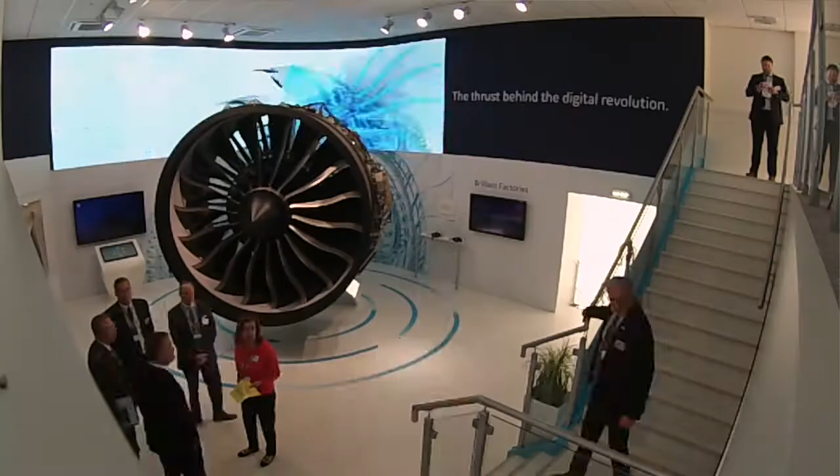Thank you, Rick. One of the very first things I want to make clear is that when GE acquired Avio Aero, there was a lot of talk about them just being a supplier to GE. Not true. The desire from day one was that your business would grow its third-party relationships. At the air show, our vice chairman, David Joyce, made the point that Avio Aero has grown the third-party business by more than 10%. So, Riccardo, tell me about the focus there and why you think that's been successful.

Well, I think at the very heart of this success is all the firepower that GE gave us in terms of adding technology and manufacturing capabilities. We have been investing close to $100 million every year since the acquisition in our facilities. If you go there today and see how they look compared to what they were, in many cases you hardly recognize these facilities. And we see it, and our third-party customers see it as well.

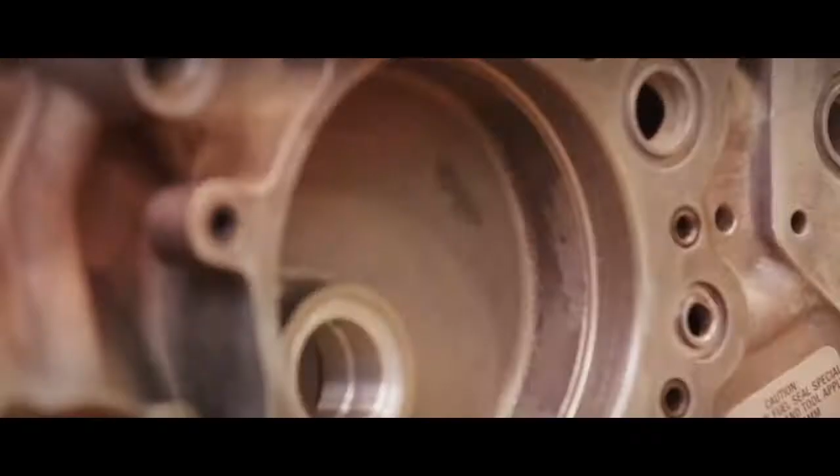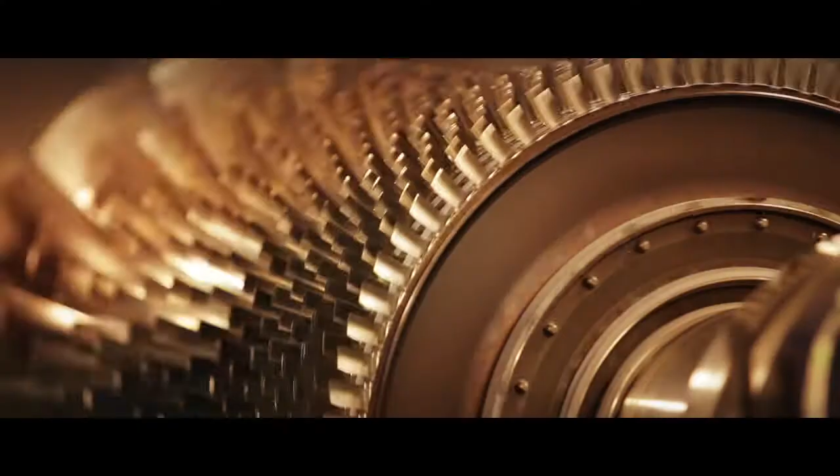Building and designing gearboxes is extremely challenging. It's one of the most difficult things on a jet engine. It's complicated. First of all, a gearbox could have 200, 300, 400 parts in it. So it's a small engine in itself, really. We go all the way from building the single parts and putting it together, to testing. It's a very complex exercise.

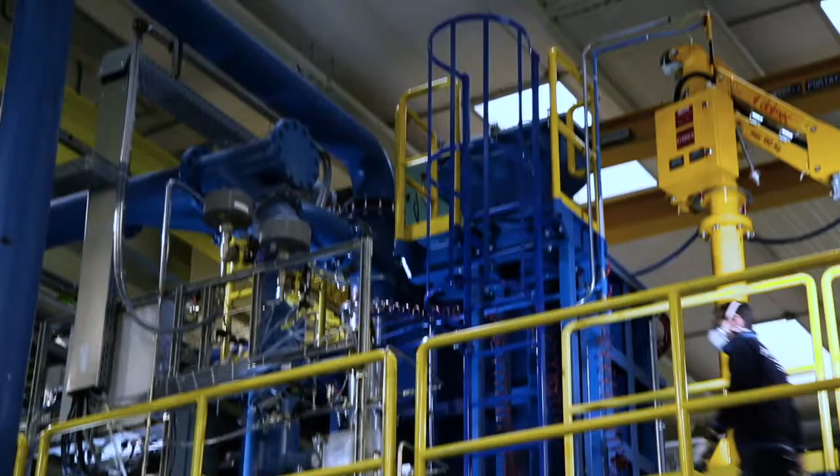Another subject, additive manufacturing. As we all know, GE has made a big move in additive manufacturing, but at Avio Aero this has been a technology we've been engaged in for a long time. At the air show, our vice chairman and president David Joyce was quick to point out that Avio Aero is now building 3D printed low-pressure turbine blades made of titanium aluminide, which is quite an accomplishment. We started investing, cooperating with small startups, then formed a joint venture and eventually acquired.

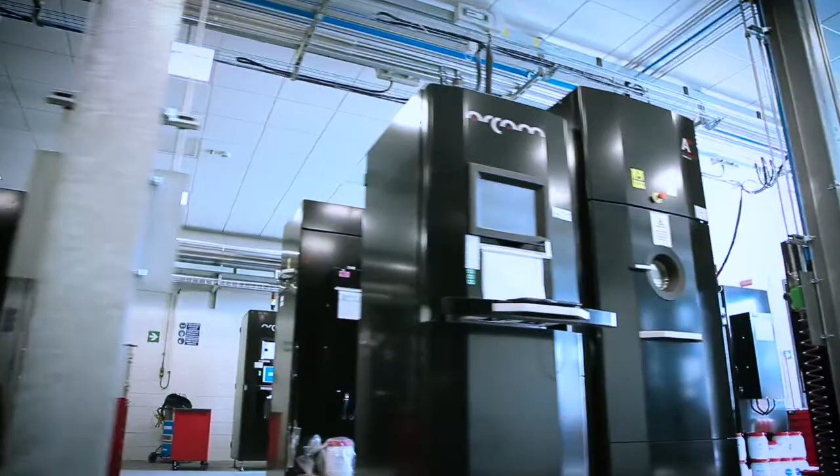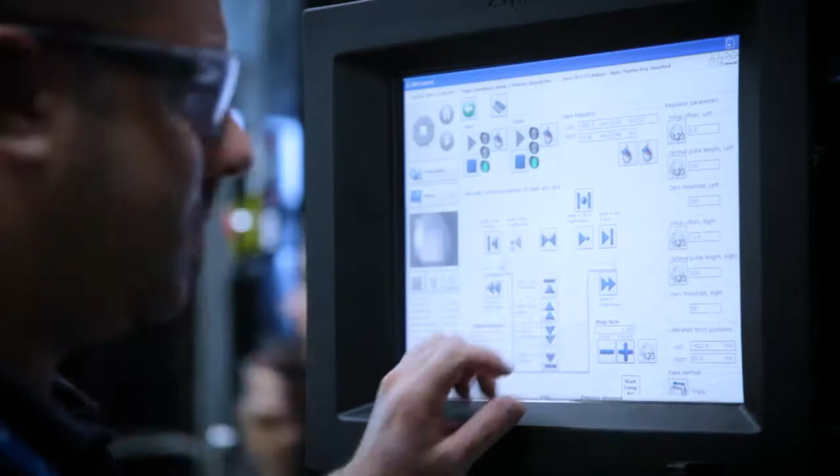At that point, we were really juggling two technologies, laser and electron beam. When GE came, it was quick for us to decide that the best thing was not to duplicate efforts, letting Greg Morris and his team do more of the laser powder work, and us focusing more on EBM. Then a great opportunity came, which I'm not sure would have come without GE, with the fifth and sixth stage of the GE9X, which is a huge challenge.

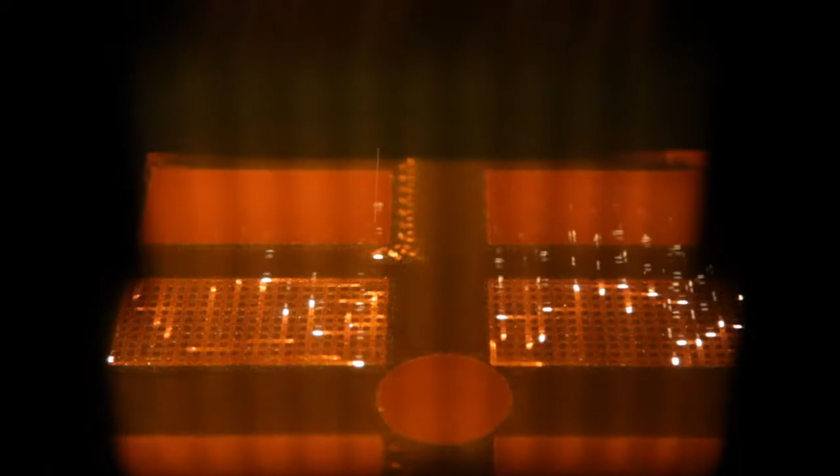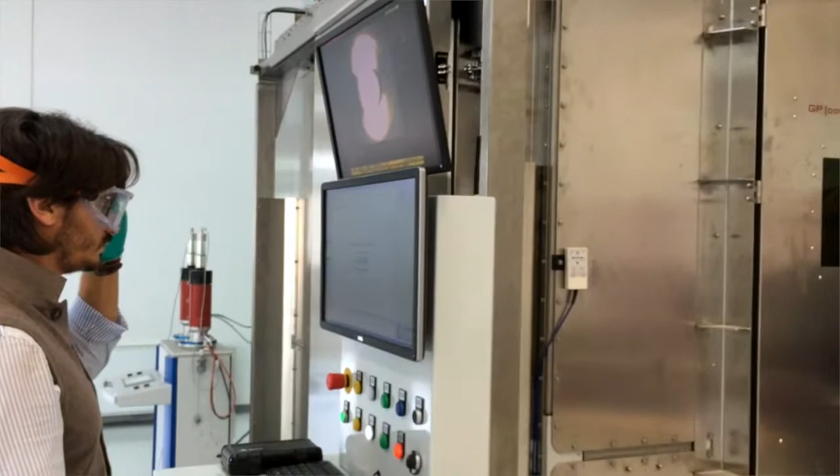Anyone who thinks buying a 3D printer is all it takes to print parts is far from the truth. On top of that, we had everything we were doing on additive repairs. This is a technology we love because of its potential. We've opened an additive repair laboratory in Bari, inside the Polytechnic university.

We are really developing this technology, and we hope very soon to be implementing it. There's a huge fleet of engines we think we can capture for repairs if we offer repairs that are not traditional. A lot of people can do traditional repairs. If we complement that capability with these additive repairs, what we're doing is mapping - if you take a blade, for example - the part that's missing or eroded, and rebuilding it by depositing powder directly where it's missing. This technology may change the world of repairs, and we are at the forefront of that race.

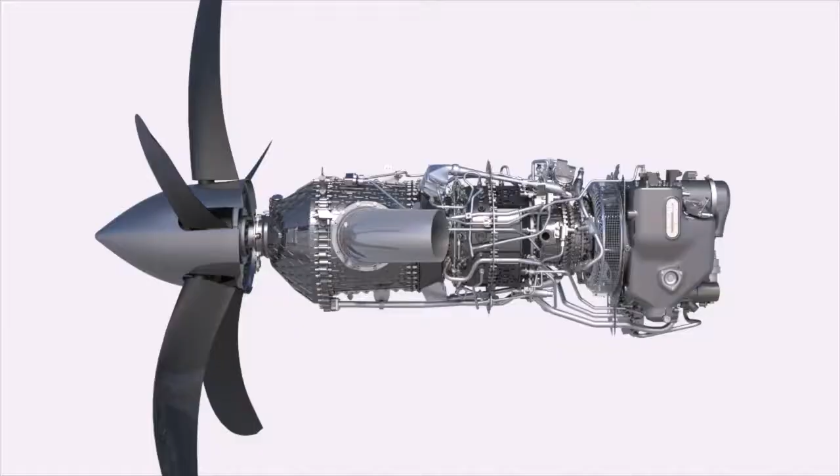Another example of the stretch and reach of Avio Aero and the change with General Electric is that for the last 10 years, GE has made a huge commitment to Europe. The relationship with Avio Aero is a great example, but just in the last two years, we've launched a new advanced turboprop engine, which will be a big part of Avio Aero's activities. This is a very exciting program - the first new design turboprop engine in decades.

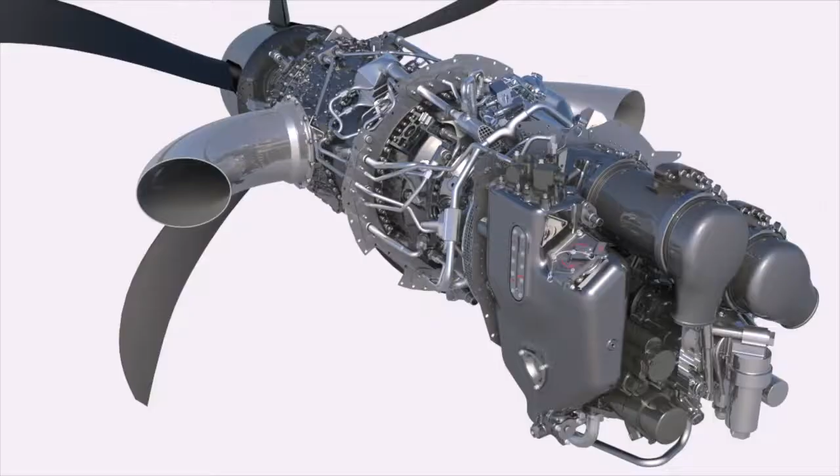This is huge. We are so proud that Brad Mottier and his team gave us the opportunity to help with the designing and engineering of the engine. It is huge, besides the fact that, as we all know, there's a 30% use of additive parts inside this engine.

But for us, more than that, what's really been an epiphany is realizing there are 12,000 GE Aviation employees in Europe. 12,000. We are one of the biggest aviation companies in Europe, and in the past we mostly operated as single dots, function by function, without being able to put all this energy and competencies together. When we mapped out our technological capabilities here in Europe, we realized we have the capability of doing a whole engine, and that's what we did with the European engine for GE.

And then we realized that we were working in Brussels, inside the European institutions, as individual small players. Now, with the help of Peter Provitt and Chris Hannan in Brussels, we realized - wow - we can go there and sit at the table.